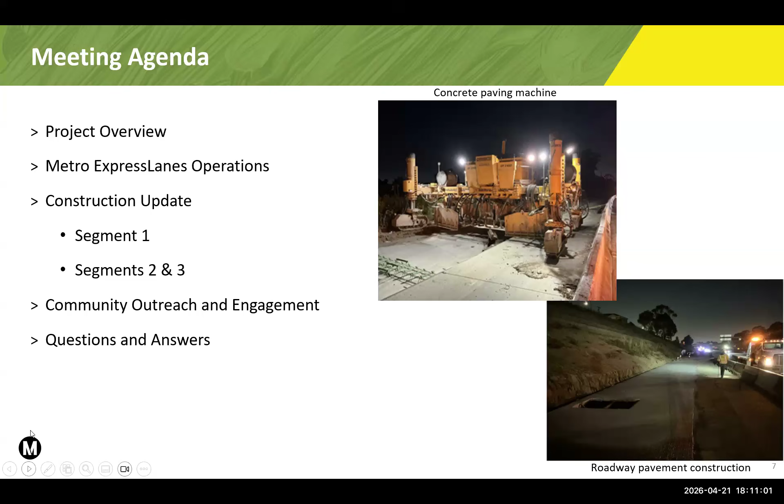Tonight, we will present on the I-105 Express Lanes project. This major transportation capital improvements infrastructure project has been under construction for some time. We started construction or started performing work activities for this project roughly 16 months ago. This project is designed to be a benefit for all motorists traveling along the I-105 as well as the surrounding communities along the corridor, as it is intended to improve travel times for all motorists and enhance safety along the freeway.

This project is actually just over 50% complete in the first segment of the project. This is the western segment of the freeway corridor. Tonight, we will provide an update on the ongoing construction, upcoming new construction, particularly in the remaining eastern segments of the corridor, and inform you of upcoming planned closures as well.

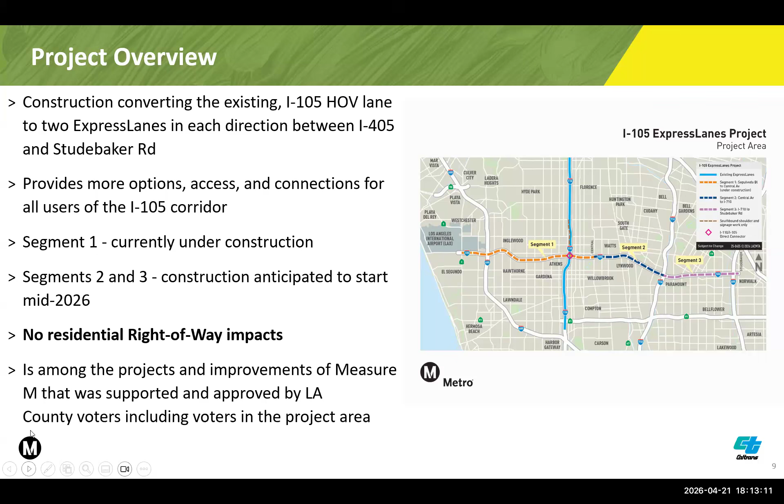Some of the benefits of the project: mainly it will be addressing what we call speed degradation. This means that the current HOV lanes are not operating as intended, with speeds well below 45 miles per hour during peak periods. This will enhance operations and improve trip reliability and travel times for all motorists, including HOVs, vanpools, commuters, and transit service to LAX.

There will also be some safety enhancements. We will be addressing an auxiliary lane gap closure, and this will in turn reduce stop and go traffic, which will by extension also reduce rear end collisions. There will also be less freeway overflow and congestion on local streets. We'll be shifting vehicles back onto the freeway, and this will help improve livability for corridor residents.

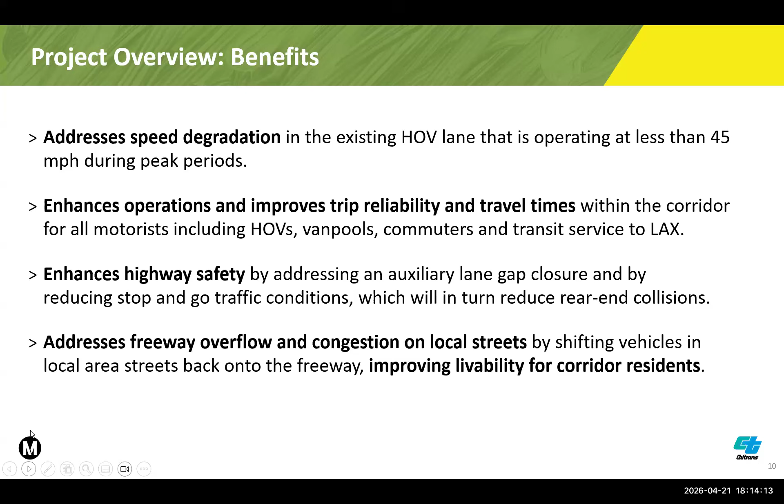This just shows some of the data that we have. I'm not going to go through every single bullet, but basically this is showing us, as I mentioned in the previous slide, the HOV lanes are not operating as designed, with speeds well below 45 miles per hour during peak hours in both directions. So HOV lanes are classified as degraded per federal standards, meaning that they're operating below 45 miles per hour.

This project is expected to also reduce travel times on general purpose lanes. General purpose lanes just means all the non-HOV lanes, or what we call the regular lanes of the freeway. So these will also help improve travel times on the general purpose lanes. And again, express lane speeds are expected to maintain their travel speeds at above 45 miles per hour.

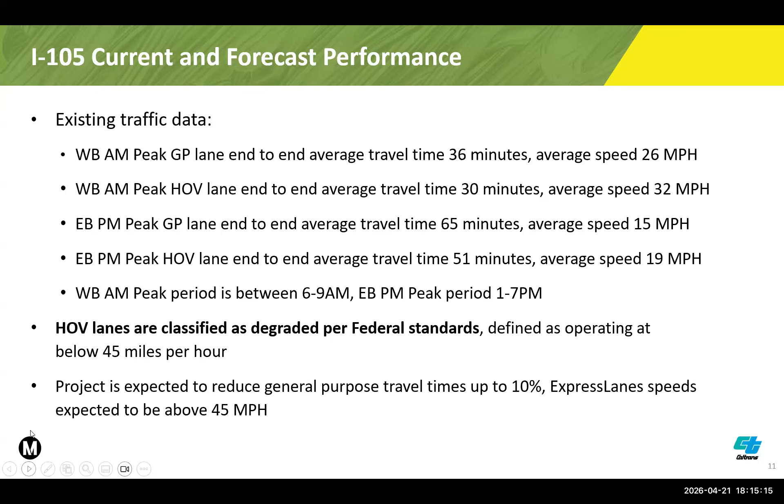There will also be a number of safety benefits to the project. There will be new auxiliary lanes between the I-710 and Long Beach Boulevard to improve lane merging. As mentioned earlier, there will be improvements to traffic flow, reducing stop and go traffic, which in turn reduces the amount of rear end collisions.

There will also be updated lane striping, and this will help better visibility during nighttime driving. There will also be channelizers installed for the buffer zones between the express lanes and the general purpose lanes, and this will help reduce illegal merging while vehicles are traveling through the corridor.

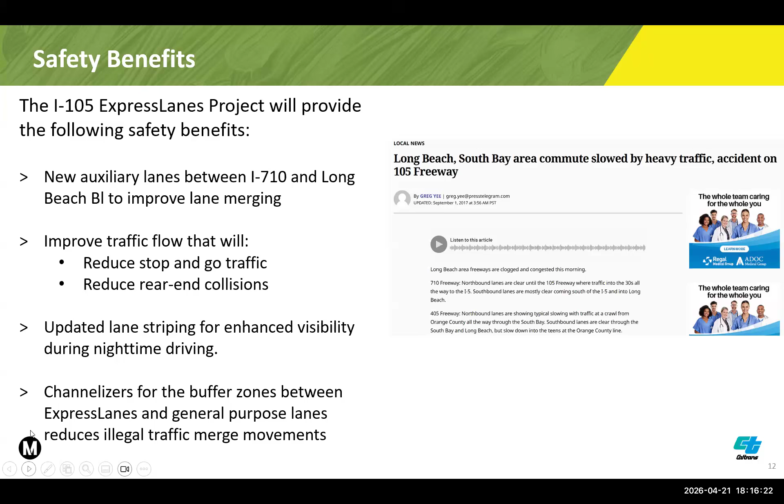Here on the right is just a quick snippet of some local news reports of heavy traffic accidents on the I-105. So this is again well documented, and this is what the project intends to address.

Some additional improvements: there will be some new sound walls, most of them with increased heights throughout the corridor. This is in addition to the sound walls that are already there. There will also be the seismic retrofit of the Alameda Viaduct.

Lastly, there will be some multimodal improvements. This project will help fund some of the improvements at the Harbor and Avalon C Line stations, which run down the center of the corridor in the middle of the freeway. They will improve things such as lighting, wayfinding, repair and rehabilitation projects. And all future net toll revenue will be used to fund active transportation, transit, and roadway projects in the local communities along the project alignment.

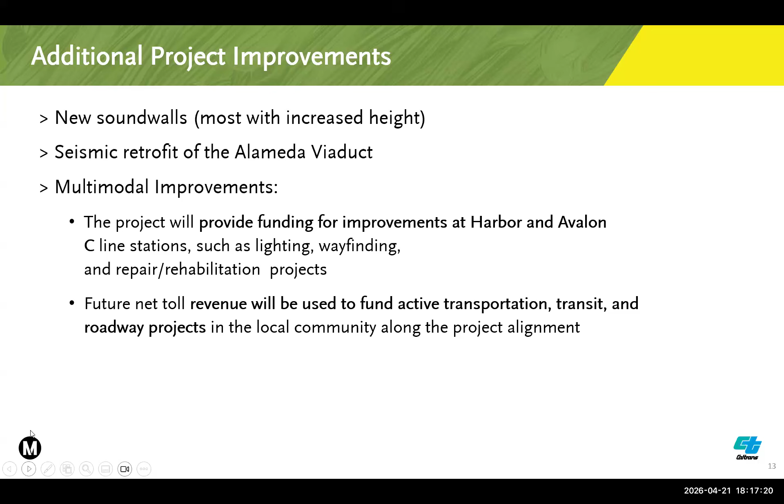This is what the new lane configuration and dimensions will look like once the project is completed. Going from the right of your screen to the left, starting with 2 express lanes, followed by that buffer zone I mentioned, which will have channelizers to help reduce illegal merging in the area.

That is followed by 3 general purpose lanes. These are just the regular lanes, not express lanes, but they're also expected to improve travel times. After that we have the auxiliary lane, which will help with merging on and off the freeway, reducing stop and go traffic and in turn reducing rear end collisions.

And then finally, a shoulder lane all the way to the far left for any kind of emergency, if you need to pull your car over or need a tow truck, anything like that. That shoulder lane will be maintained.

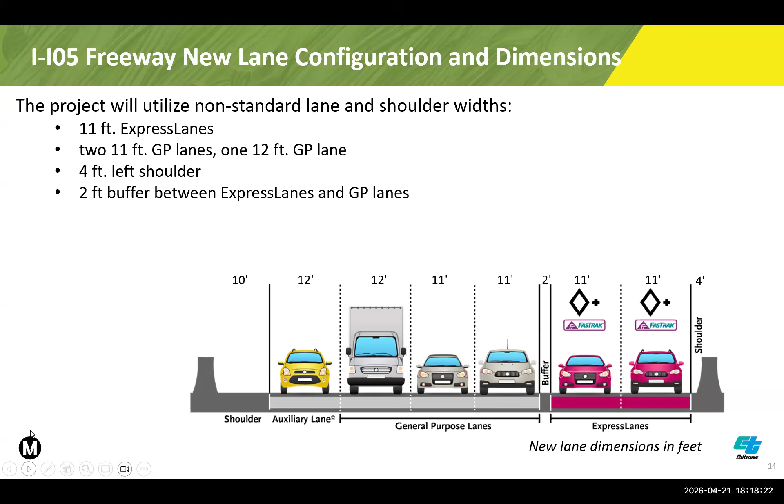A little bit about how express lanes will work. I'm going to pull in Philbert Wong to talk about how the new FasTrak tolling systems will work.

Good evening, my name is Philbert Wong, and I'm the Director of Planning for Metro Express Lanes. If you've used the 10 or 110 express lanes, the way the 105 express lanes will work will be familiar to you. Like the 10 and 110 express lanes, we have designated areas where you can enter and exit the express lanes, and these locations will be in about the same places where you can get into and out of the HOV lane currently on the 105.

In advance of those areas, we have signage that tells you where you can get in and out, and we also have pricing signs that tell you the toll rate to travel that segment of the express lanes. If you are a qualified carpool, you can travel toll-free.

You do need to have a switchable transponder to use the Metro Express Lanes. This is a picture of our new transponder. It's about half the size of the old transponder, and there's no battery in it. You adjust your switch setting depending on how many persons you have in your vehicle.

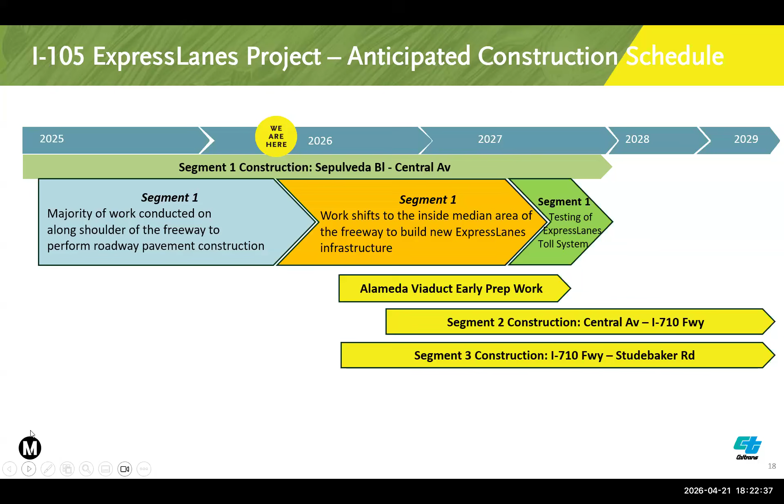Some of the work activities you'll see for this project: roadway pavement construction along the shoulder or outer edges of the freeway. As mentioned earlier, there will be new and reconstructed sound walls, most of which will have increased heights. There will also be new retaining wall construction, undercrossing and bridge widenings to accommodate some of those lanes. We're now in the second phase of Segment 1 construction, which includes toll infrastructure, equipment, electrical systems, signage, and pavement markings.

There will also be landscape and tree removal and restoration. Some landscaping will be removed temporarily to accommodate these new lanes, but will be restored once the pavement work and repaving has been completed. We will be restoring the landscaping that has been removed from the freeway.

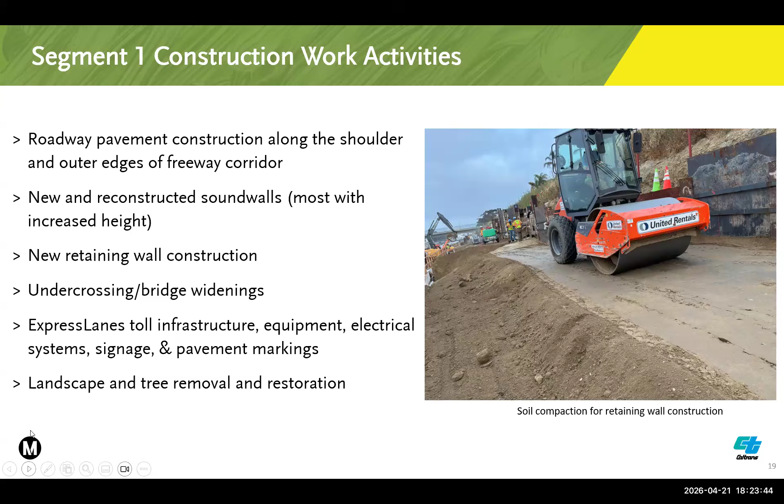Now, to talk a little bit more about some of the construction updates, as well as give us a sneak peek on what to expect in Segments 2 and 3, I'd like to reintroduce Ron Macias. Hi, Ron Macias back again.

Now I will go into some of the updates on the specific construction activities. As the exhibit shows, the number of sound walls under construction is part of the first phase of construction within Segment 1 that we're looking to wrap up soon.

Here's an exhibit of the walls. They're actually in various vacant locations, clustered at the west and also the east end of the corridor within Segment 1. In order to construct these new sound walls, and the associated work with new roadway pavement construction, the sound walls that existed along the freeway have to be removed and then later reconstructed as part of accommodating the new express lanes and the improvements provided by the project.

Most of the sound walls being reconstructed are being built to a taller height than what existed prior, roughly 4 to 8 feet taller in most cases. We are also constructing new sound walls at certain locations where they did not exist prior to the project.

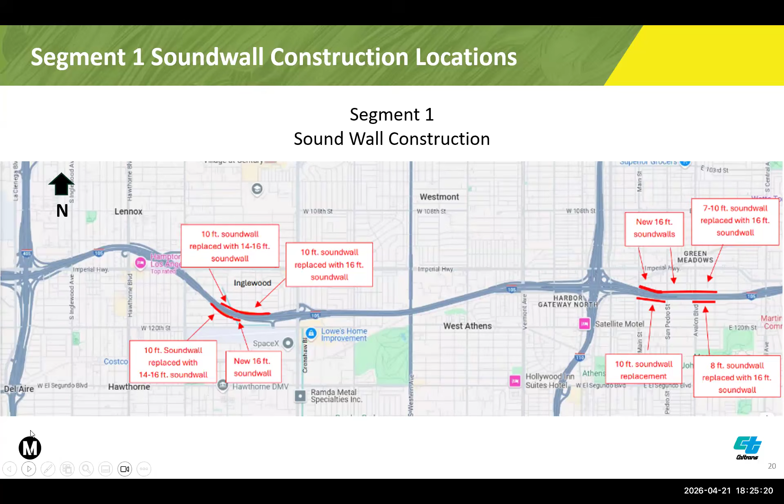Here we're highlighting some locations in the western segment of the Segment 1 corridor—these are locations of sound wall construction in the city of Inglewood and also in the city of Hawthorne.

As is the case for all sound wall construction in Segment 1, the work actually began roughly in the spring of 2025, where we had to remove the sound wall, then prepare the site and grade the area to prepare for construction of new sound walls.

We have been in this construction phase for some time. Completion of the actual sound walls, particularly in this segment of the corridor, is anticipated to be constructed by the end of the month of May of this year. The construction in other areas within Segment 1 should be completed around the summer months, or the middle of this year.

So residents will soon see their sound walls return in the area in the near future, which is part of the long-term construction under this first phase.

Most of the work has been conducted during daytime hours, and behind the K-rails, or concrete barriers, installed along the freeway to separate the work zone from the public.

After the completion of these sound walls, new roadway pavement construction will continue and be completed as part of this long-term construction.

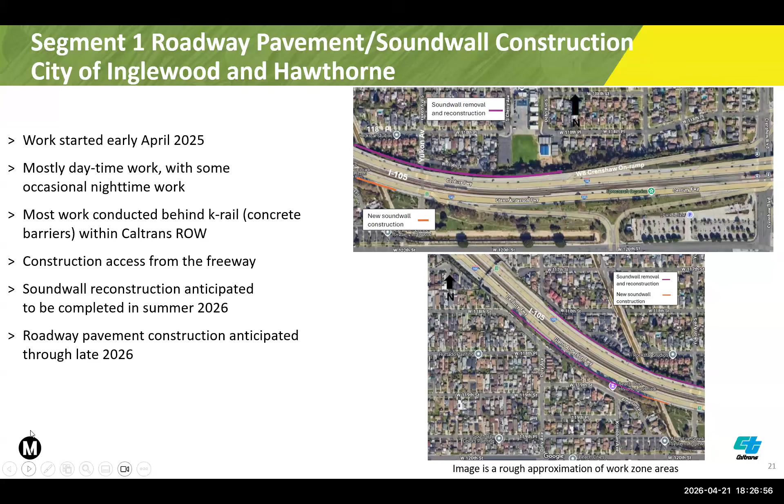Here you see an exhibit of a typical section of sound wall construction with all the completed improvements that the project will bring, and the final lane configuration the project will construct. You see the Metro C-Line guideway there. At the outer edges of the freeway, we are moving the old sound wall back out farther to accommodate the new roadway pavement construction for the project improvements and the new express lanes.

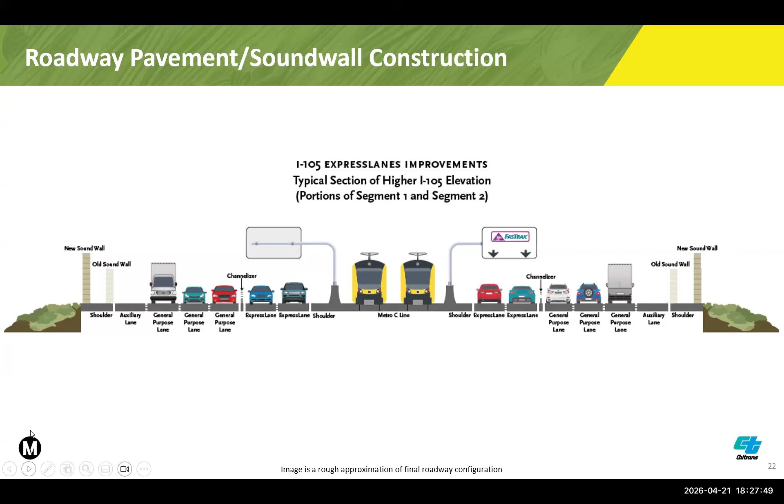This type of construction is occurring at locations along the corridor where the freeway is high and elevated above the community. These are locations with hillside slopes leading down toward the community at the outer edges of the freeway, which this typical exhibit reflects.

As mentioned, we have work activities involving various undercrossings and bridges to support new roadway pavement construction at a number of locations. These locations are depicted here in these exhibits. We have bridge undercrossings in the Inglewood/Hawthorne area, and then a number of them, roughly 5, in the city of LA.

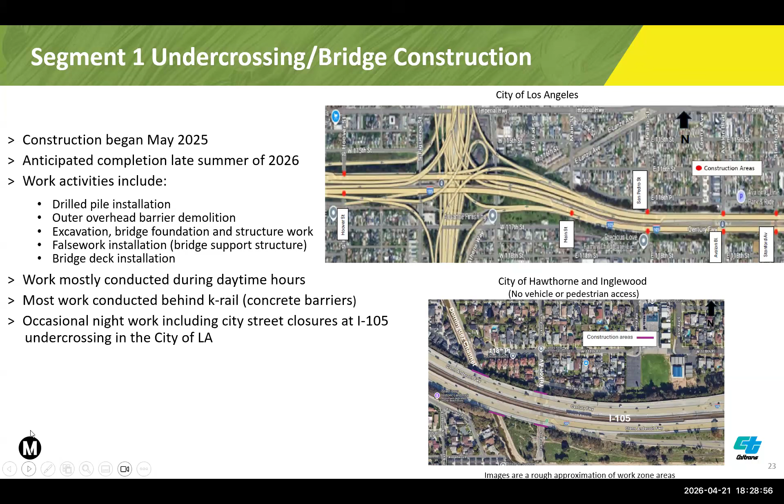Work began for the first set of bridges roughly around the spring of 2025. Most of the work activities related to this construction is done during the day behind concrete barriers along the freeway. There are occasional nighttime work activities for structures within the city of LA, as it is necessary to close the street in certain locations for particular work activities.

Here are some progress photos for the ongoing construction of the undercrossing at Avalon Boulevard. One photo shows the footing under construction for the abutment, or the end support structures, of the undercrossing bridge. The other image shows concrete work being performed for that undercrossing at Avalon Boulevard.

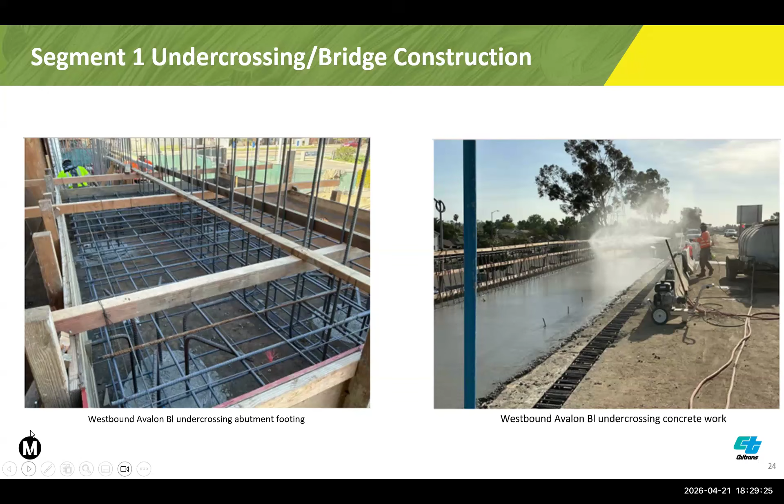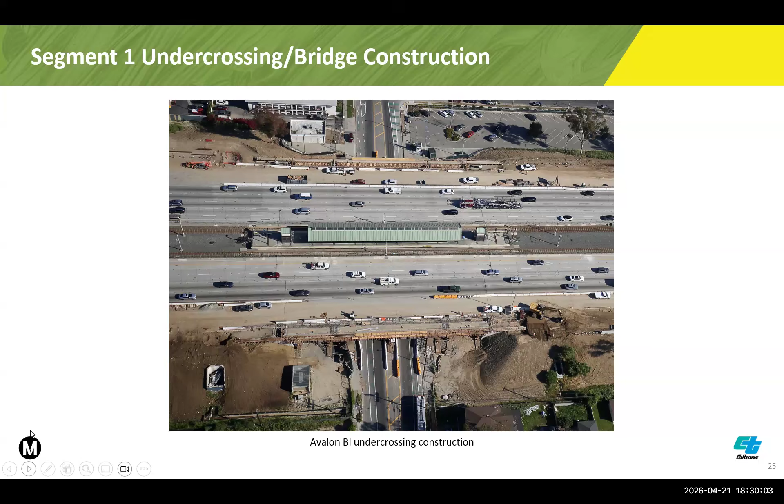As mentioned, we have retaining walls being constructed at various locations along the freeway as part of the new roadway pavement construction. Work started roughly around the spring of 2025 for the start of construction for these walls. Most of the work is being performed during daytime hours behind concrete barriers. There is some occasional nighttime work necessary, as there is occasionally a need to close freeway lanes to perform certain work activities.

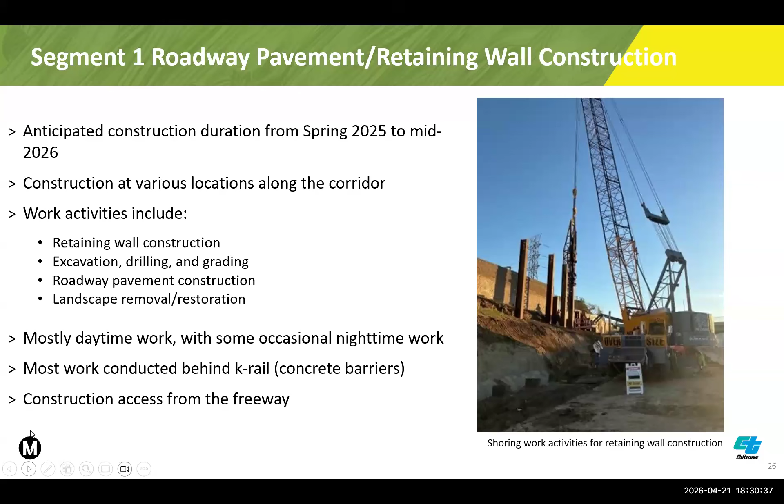This slide is presented to demonstrate a typical location along the freeway where retaining walls are being constructed within the Segment 1 area. This is a section along the freeway between Vermont Avenue and Crenshaw Boulevard, as most of the retaining walls within Segment 1 are being constructed there. Segment 1 is between Sepulveda Boulevard and Central Avenue, just east of the 110 freeway.

The top image is a typical representation of where the work is being performed along hillsides located along the exterior of the freeway corridor. This is where retaining walls, as well as new roadway pavement construction and improvements, are being built right into the hillside at these locations. In this typical location, the freeway is at a lower elevation from the top of the hillside where the community is located. So this is roughly a typical location of where these retaining walls are under construction.

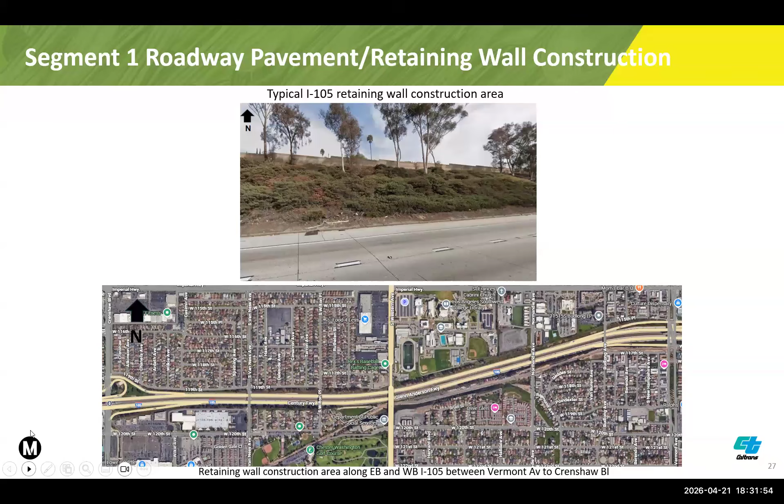Here you see an exhibit of a typical representation for work activities involving retaining wall construction. You see the construction equipment in the center of this image, with traffic on one side, and on the right part of the image, the work being done behind protective barriers along the freeway, directed against and along the hillside. In the center of the image, you see construction equipment, an excavator digging into the hillside and removing the soil and earth to eventually construct a new retaining wall against the hillside, which is the first dotted vertical line you see.

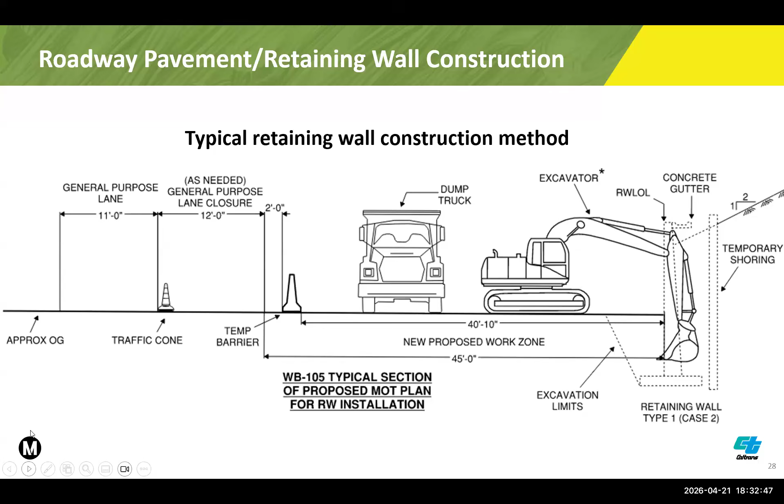Here is another exhibit of a typical cross-section, similar to the one shown earlier, but this is for retaining wall construction as it is in essence the inverse of the other image. In this case, construction is performed where the freeway elevation is much lower and below the elevation of the community, with the hillside slope leading up from the freeway to the community. The retaining walls are at the outer edges and constructed into the hillside to accommodate the completed improvements of the project. There you see the final lane configuration, as well as the Metro C Line train guideway in the center.

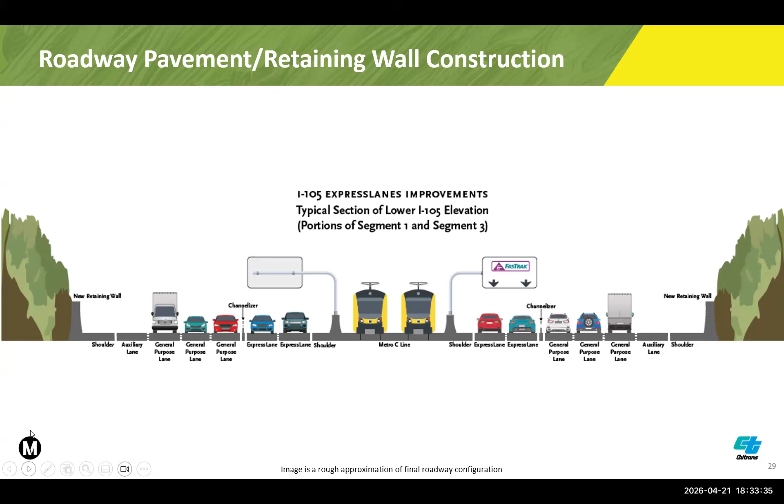The project continues to implement traffic control as part of and in support of facilitating the building of these project improvements. There is a need to implement some traffic restrictions in order to perform construction, which is usually done during the nighttime hours. However, to date, most work activities have been conducted during daytime hours within work zones behind concrete barriers without the need for traffic control.

However, we do on a regular basis implement traffic control during late nighttime hours at intermittent locations along the corridor. We typically have closure of some freeway lanes to facilitate ongoing construction, and also closure of ramps and connector ramps implemented intermittently throughout the corridor to support the overall work. There are instances on occasion where the project implements directional closures along the freeway, entailing closure of the freeway in one direction of travel during late night hours.

We performed this in the early stages of construction, where we implemented a series of closures in one direction of the freeway to support lane restriping to establish work zones. This was to maintain the existing amount of lanes during construction so traffic can operate as normal during the long-term construction, and this was conducted well in advance of construction.

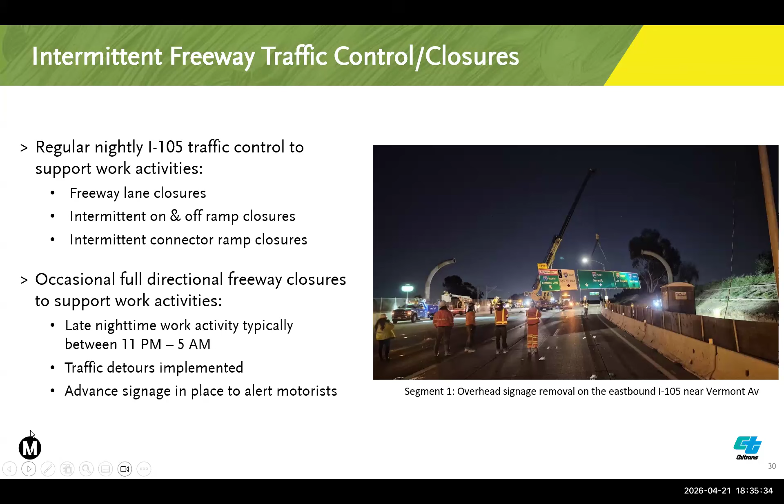We also have a major upcoming project development involving weekend extended closures of the freeway. The project will need to implement a series of extended lane closures in one direction of travel over a series of weekends to safely perform critical work activities. These closures involve the closure of the inside center lanes in one direction over entire weekends, anticipated to start in the spring of this year and continue on an intermittent basis through early 2027.

The first extended closure is anticipated this weekend, April 25th to the 26th. It's going to be a two-lane closure in the westbound direction, roughly around Western Avenue in the segment 1 area. This work is to facilitate the relocation of power lines for the Metro C line that operates at the center guideway there, as you can see in the photo.

We are targeting a second closure in the month of May. This date is not confirmed at this time. This is intended to be the start of a multiple series of closures pertaining to sign structure work at the center median of the freeway, which we anticipate implementing until early '27. We are targeting May 16th to 17th, but that is not confirmed. We will certainly inform the community if this date is confirmed, but it is tentative at this time.

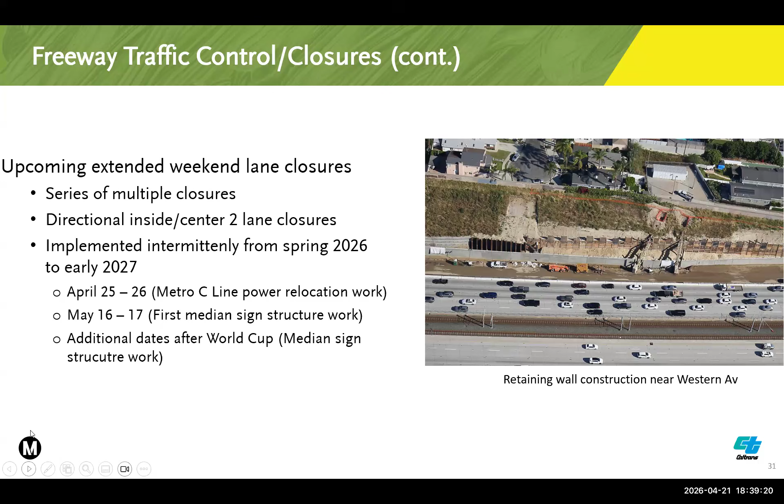As Jesse stated, the project will soon begin construction in the segments 2 and 3 area, which is the western area of the corridor. Much of the construction will be very similar to what is being performed in the segment 1 area as part of the project.

We will continue to construct new roadway pavement in this part of the corridor to accommodate the project improvements and the new express lanes. Other work performed in conjunction with new roadway pavement construction will entail new sound walls and reconstructed sound walls, many of which will have a taller height than what existed prior. The construction of these sound walls is primarily in the segment 2 area.

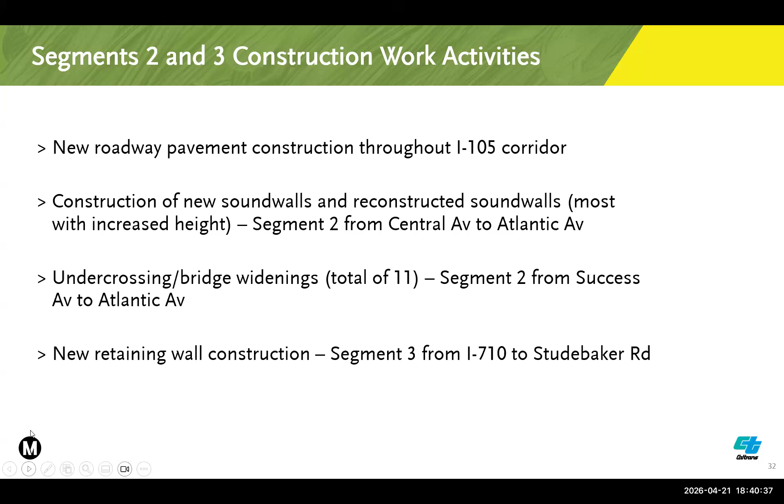We also have a number of undercrossings and bridges that will be under construction, performed in the segment 2 area as well, which is between Central Avenue and the I-710. We also have retaining wall construction, which is done primarily in the segment 3 area only.

In advance of the start of major construction, there will be some minor pre-construction activities anticipated to begin very soon. These are done in preparation for major construction in the segments 2 and 3 area, entailing utility verification, freeway field investigatory and surveying activities, and pre-construction surveys of local streets and properties in the area.

In addition, early prep work will begin at Alameda Street and Imperial Highway. A number of various utilities will have to be relocated in this area in advance of major work related to the retrofitting and widening of the Alameda Street Viaduct, a very large overhead freeway structure. To perform all the work activities and construction in the area, there will be a need to implement a long-term traffic reconfiguration, or lane reductions, along Imperial Highway throughout the entirety of construction at this location.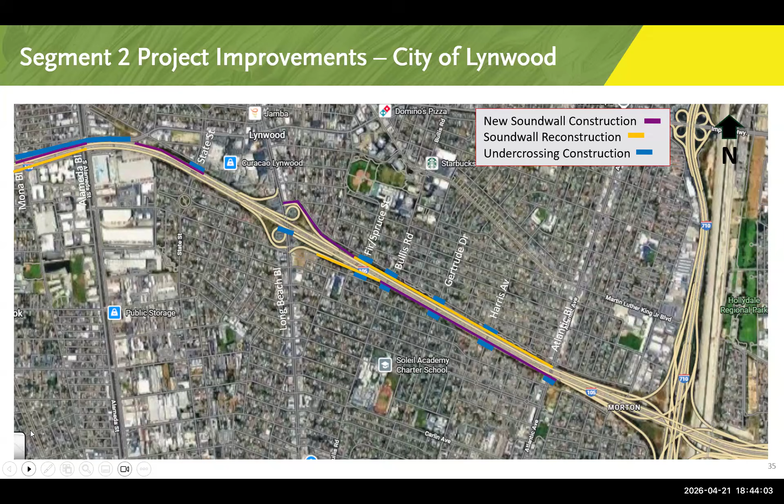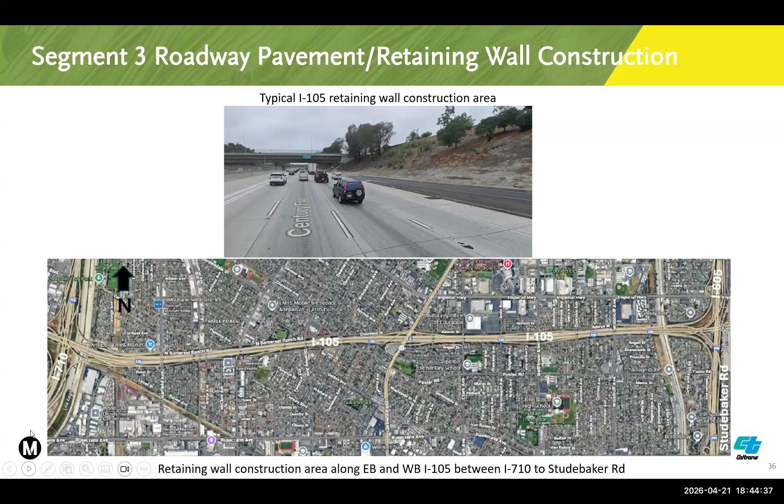As we move further east, retaining walls are constructed at various locations in the segment 3 area. This section of the corridor primarily only has retaining walls that will be constructed, located between the 710 freeway and Studebaker Road, near the I-605 freeway. The image at the top is a typical image showing where such work activities are being performed into and against the hillside.

So I'll just wrap up. This is what you can expect regarding the overall work activities and improvements in the segment 2 and 3 areas. In the eastern areas of the corridor, we will look to release more specific information with respect to construction timelines and construction details for the various activities at these locations. So more information on this is to come.

At this point, I will turn it over to Jesse to talk a little bit more about our community outreach and engagement efforts.

Thank you, Ron. I'll very quickly go over some of the type of outreach and engagement that we have been conducting for this project, and there's quite a bit. We coordinate with key stakeholders in the area for segment 1, good examples being LAWA, LAX, and what we call the big 3 venues at Hollywood Park, which is SoFi, Intuit Dome, and the Kia Forum. We also target community groups for briefings.

We send out construction updates and community meeting mailers. Many of you on the call may have received one in the mail, or through our email campaign. We also distribute construction notices ahead of any scheduled work, handled in many ways: hard copy distribution, our email distribution lists, websites, and social media accounts, and in some instances, direct mail or door-to-door distribution.